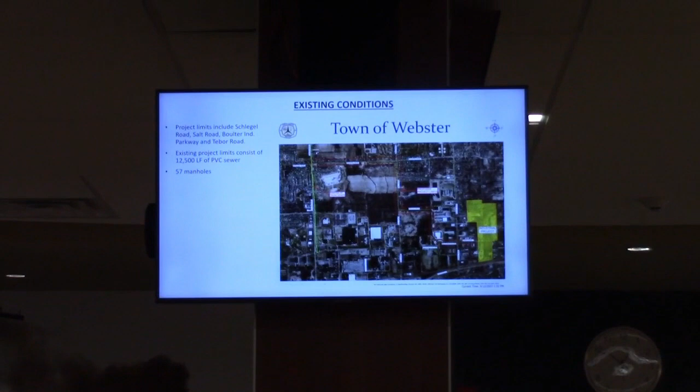The project limits are shown on this slide. It's from the intersection of Phillips Road and Schlegel to Salt Road, through the private drive, north of Xerox, through the Boulter Industrial Park, across Basket and terminating at Tebor Road.

Some of the early things we did in this project, we got involved with a flow monitoring company, and they installed flow meters in 4 separate manholes at confluence points in the network, and they gathered data for 2 months.

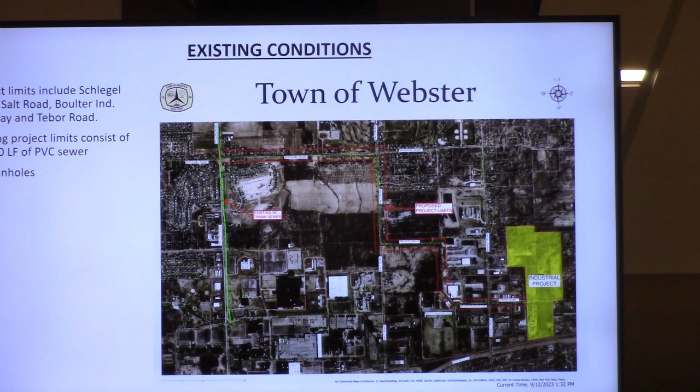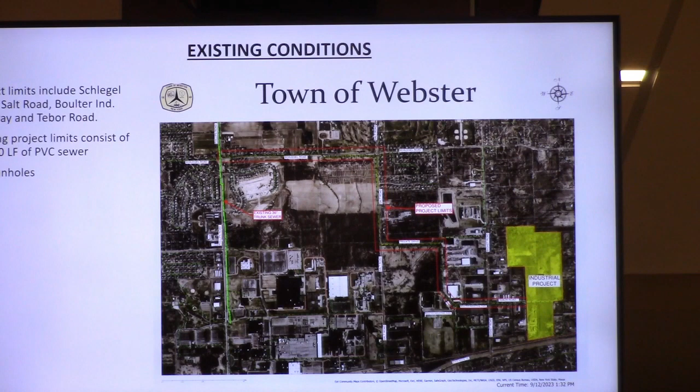That was important so we could get a baseline flow and understand the existing capacity of the sewer. Early on, we had discussions about what the anticipated additional flows would be entering this sewer network, and we wanted to know if the system was near capacity or if it had excess capacity. The network itself contains about 12,500 feet of sewer pipe and 57 manholes.

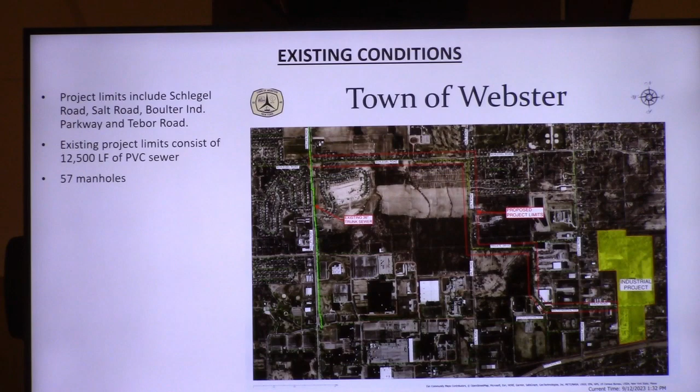As I said, we did the flow metering to determine the impact on the sewer network. Through this, we determined about 770 gallons per minute was the peak flow at the downstream end of the network. Again, the capacity of the sewers was calculated based on the diameters and slopes of those pipes. We completed a field survey and got information on every pipe and every manhole through that network.

When we spoke with Fairlife, we were able to determine very specific flows from that team. They are proposing flow mitigation, or on-site storage, to regulate the amount of flows that leave the site. With a peaking factor added, that site alone will contribute over 2,000 gallons per minute to the network, considerably more than is flowing through the network today.

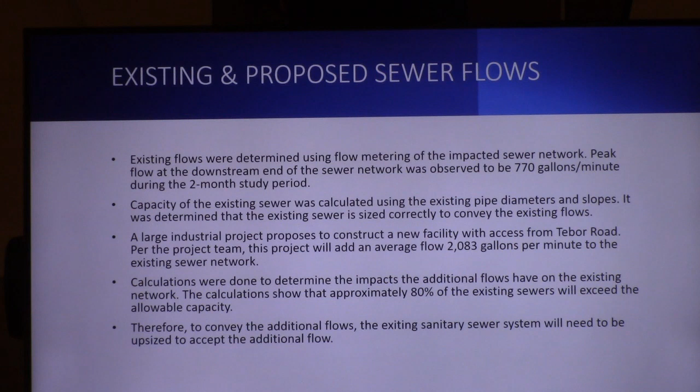In part of our calculations, in fairness to Fairlife coming into this project, we wanted to determine at what baseline the sewer pipe would be at capacity, and we were able to determine that the majority of those were well in excess of capacity, some at 500% capacity when the Fairlife flows were added in.

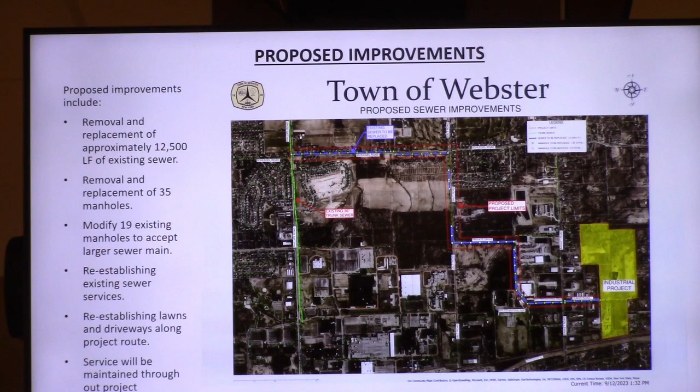So with that, we were able to analyze what upgrades would be required to convey these proposed additional flows. The project includes the removal of roughly the entire sewer network and upgrading those sewers in place of where they currently are, knowing that there were certain site constraints that would restrict major modifications to the layout.

One constraint being the easements that the existing sewers were located in, down to the level of the bedrock in which this existing sewer was laid. So our design plan was to essentially replace in kind and upsize as needed to convey those flows.

As you can see, the project will replace almost the entire sewer network. It will remove and replace 35 of the 57 manholes. We're able to modify 19 of those manholes, coring them to accept the larger pipes, in an effort to minimize costs of the project.

Existing sewer laterals will be temporarily out of line and brought back in during the project, and it's anticipated that no lateral connection or stretch will be out for more than a working day, coordinated throughout construction. Obviously, lawns and driveways throughout the project route that are disturbed will be repaired as part of the project.

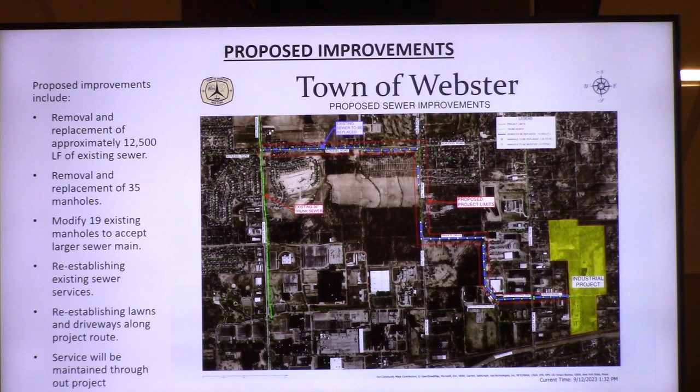One of the other things that town staff wanted to look into in our meetings was not just the capacity for this project, but capacity for future development in the area. So we worked with the town, and with some additional minor improvements compared to the entire project, we're proposing removal and replacement of an additional 600 feet of sewer.

We're upsizing 900 feet of sewer above and beyond what was necessarily required for the proposed project, anticipating future growth. While the contractors are out there, they're going to add 15 new laterals to vacant properties, so they will be available in the event that a developer would come to that property.

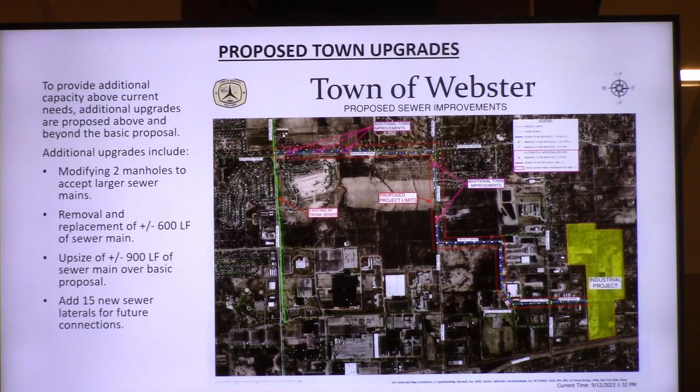Part of the project, we prepared a cost estimate. We utilized construction estimating software RS Means, as well as recent bids from local projects and conversations with some specialty contractors for some of the more specialty items.

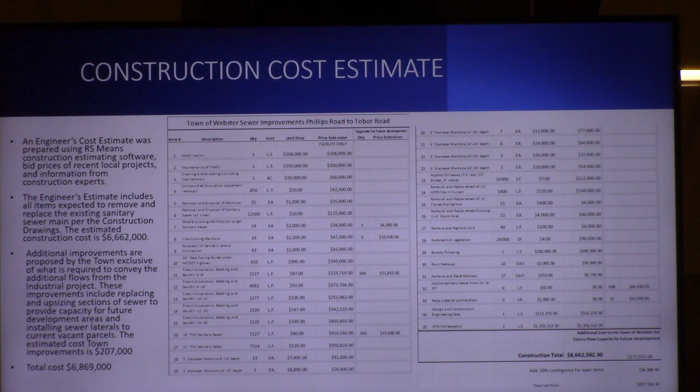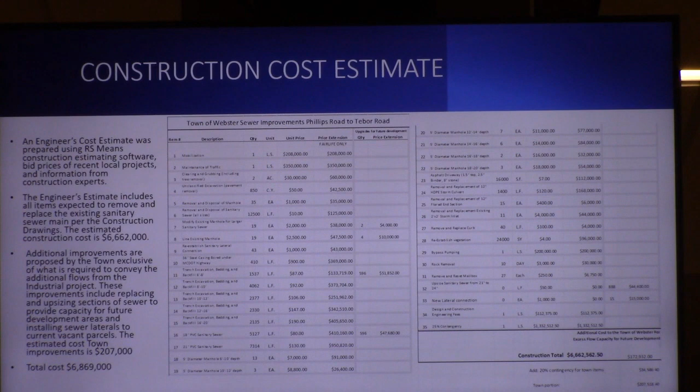Our engineer's estimate for all the work associated with the 2,000 gallon per minute additional flow came to an estimate of 6.6 million, and additionally the town upgrades for future capacity totaled another $200,000. So our total construction estimate is roughly 6.8 to 6.9 million. We spent a lot of time and went through a lot of detail to be specific in the items that were included.

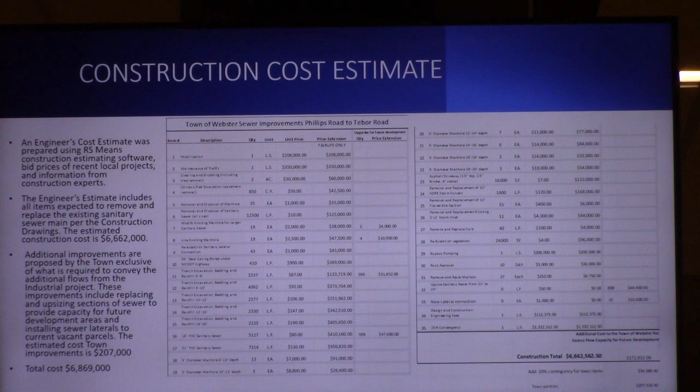So we're confident in this estimate. And in terms of the project schedule...

We've done a lot on this project. I know some of the next items coming up is the resolution with the town board. If that goes forward, then we will work with Art and town staff on putting out a legal notice and advertising for bids. It's anticipated that the bid opening will be mid-March, and that the contract can be awarded later in March. It's expected that mobilization for construction will start in May, and it's anticipated that substantial completion of all work will be done by the end of this year.

So our office will be involved with inspections during the construction time, working with Art and the contractor to make sure everything is done per contract. So with that, I'd be happy to answer any questions and go into more detail if the board has questions.

The question everybody had regarding this is your 7 months of construction seems pretty impressive for a project of this magnitude.

Yeah, and we went back and forth, and again, we talked to contractors, not specifically about this, but in terms of timing, roughly 300 feet a day, or what would be considered a barrel stretch a day, is considered reasonable. We've gone through, the portion along Schlegel is going to be the slower portion of the project, just because there's a lot of existing residents, there's not a lot of room, and the sewer in that area is very deep. But once you get over to the intersection of Schlegel and Salt, you're much farther off the right-of-way. There's not many properties or existing utilities in the way, and the farther you get to the proposed connection, the shallower where the sewer is.